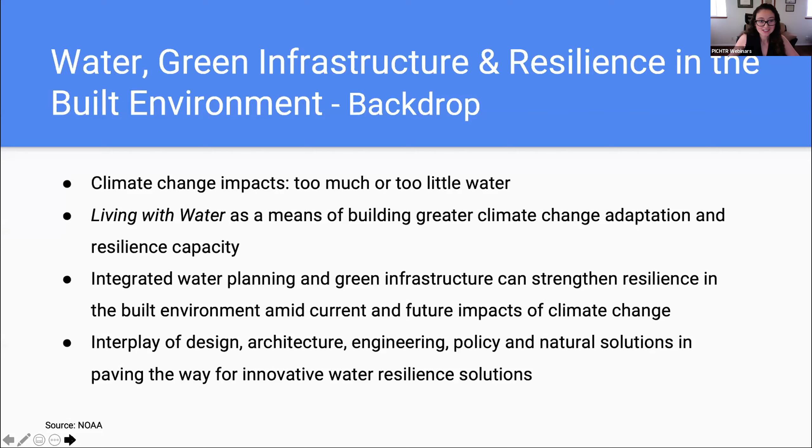As you can see, we have a ton to talk about. So without further delay, I would like to introduce you to our esteemed panelists. First, we have Judith Stilgenbauer. She is a professor of landscape architecture and urban design at the University of Hawaii at Manoa, where she serves as the founding director of the Masters of Landscape Architecture program. Judith's creative work in teaching and applied research focuses on the role of process, performance, and placemaking in ecological urbanism and public open space, that is, design across diverse spatial and temporal scales. Her recent design research has focused on urban and land-water relationships and adaptive coastal resilience design.

We also have Barry Usagawa. He is the program administrator for the Water Resources Division of the Honolulu Board of Water Supply. He administers water systems planning, water conservation, recycled water, long-range planning, hydrology, geology, and project review functions of the department. So certainly he has a huge role to play. Barry is also a member of the Hawaii Community Foundation's Freshwater Council, which developed the state freshwater blueprint for water conservation, reuse, and recharge targets to ensure 100 million gallons a day of resilient water by the year 2030. As you can tell, we have two amazing panelists today.

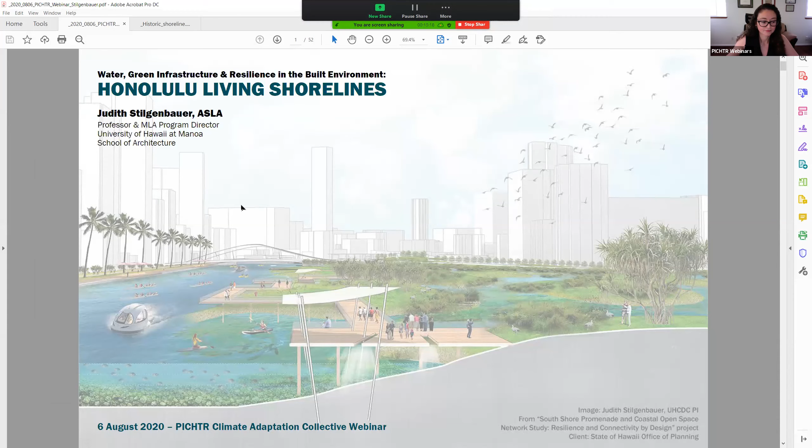So today I want to spend the next 15 minutes highlighting the importance of incorporating nature-based urban design strategies in the long-term planning for resilient waterfronts, in this case applied to Honolulu's primary urban center. Specifically, I'd like to visualize what coastal adaptation strategies, such as living shorelines aimed at decreasing climate-related vulnerabilities, might look like in urban Oahu.

When I give these kinds of presentations, my goal really is to advocate for anticipating climate crisis-related urban challenges, such as multi-hazard flooding and nearshore developments, and visioning potential solutions now, so we can think, plan, and regulate well ahead of time, rather than treating these projects as post-disaster recovery planning.

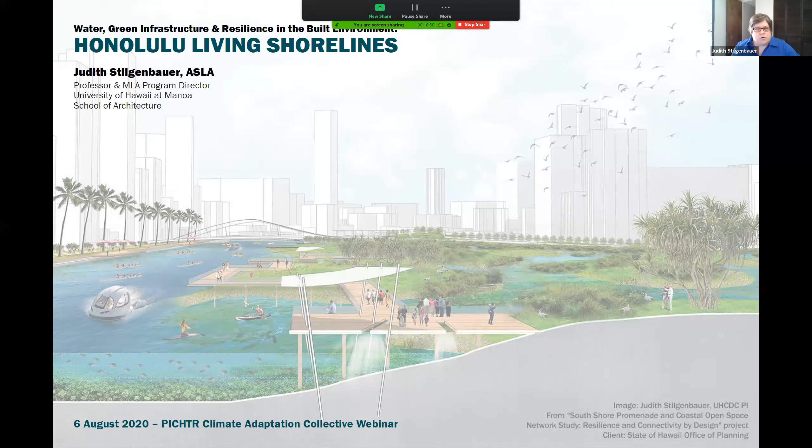So with that, I want to jump into talking a little about green infrastructure. Looking at the attendee list, many of you are familiar with this concept, so I'll keep it brief. At the most basic level, you could think of vegetated elements in the built environment as green infrastructure. These systems harness natural processes by providing ecosystem services for communities and sites—for example, protecting neighborhoods from flooding and managing and filtering stormwater.

It can help us prevent erosion, contribute to combating the urban heat island effect, and through phytoremediation processes has the ability to remove pollutants from soil, water, and air. Green infrastructure also sequesters carbon, and there are many other ecological and social benefits—linking ecosystems, providing habitats, and thus increasing biodiversity and overall resilience.

So as a landscape architect, I like to think that green infrastructure can supplement, or in some cases even replace, outdated, gray, engineered urban infrastructure in smart and also cost-efficient ways.

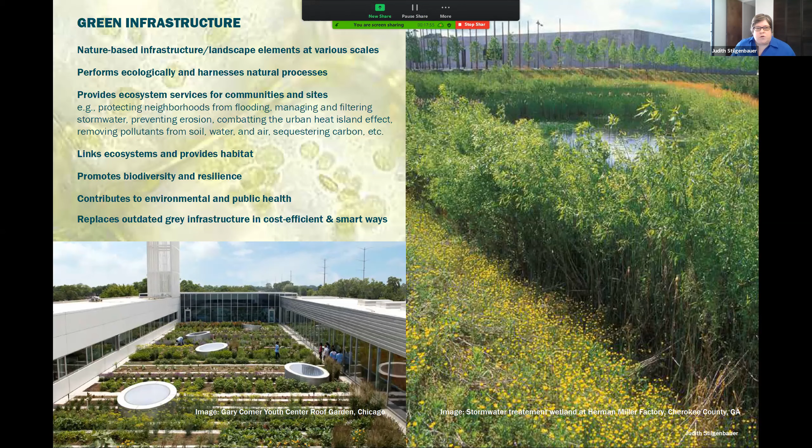So my remaining 12.5 minutes I'll spend illustrating some of these concepts through my team's South Shore Promenade and Coastal Open Space Network project, which we've been working on with the State of Hawaii Office of Planning for two years. I'll use visuals and design drawings from that project to illustrate how large-scale green infrastructure systems can help us address coastal climate-related vulnerabilities.

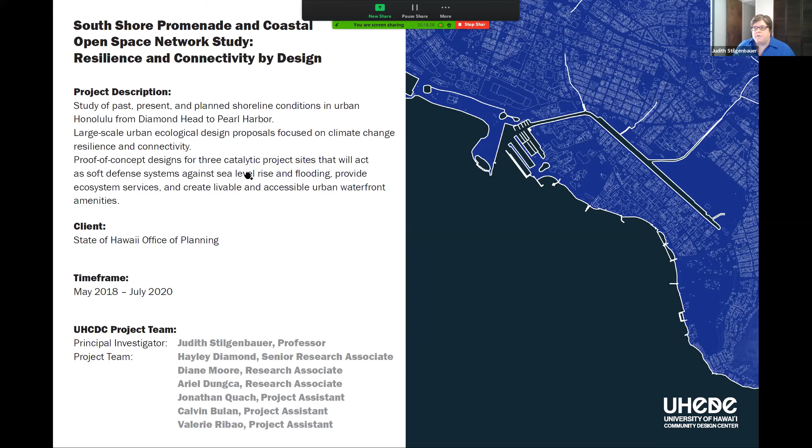What you'll find is that in this type of work, rather than focusing on flood control and sea level rise adaptation alone, we really intend to view urban open space design more comprehensively—balancing aspects of climate resilience, ecological performance, connectivity, and the cultural aspects of placemaking—demonstrating that those goals are in fact perfectly compatible and mutually beneficial in many cases.

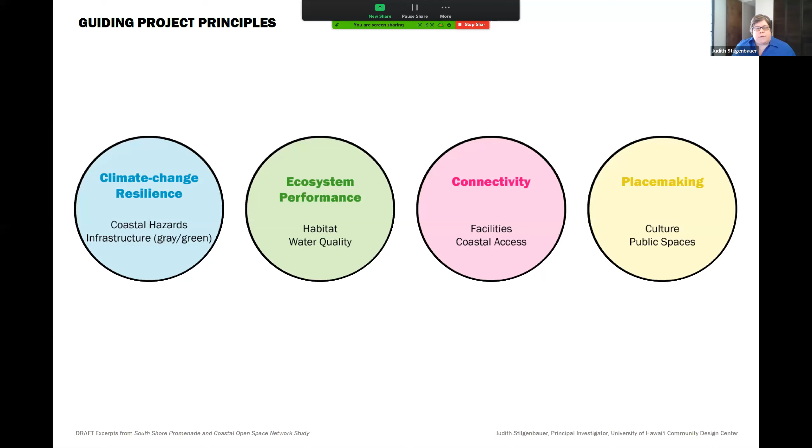So let's dive right in. I don't think I need to explain to this audience the severe impacts we're expecting in the primary urban center of Honolulu over the next 50 to 100 years related to sea level rise and increased coastal flooding. For this project, we did 100 analytical maps that I'm not going to show you today because we only have 10 to 15 minutes.

When we studied these coastal areas, we found that many of the sites—not all of them, of course, but many that are most vulnerable early on—are publicly owned, either by the feds, the state, or the city and county, which, when thinking about implementing early demonstration projects, might help us in this instance.

Now, when we study the outcomes of many related planning and design initiatives across the country, we find several commonly agreed-upon strategies that we apply as planners and designers for dealing with sea level rise and coastal flooding adaptation. I like to use this slide to summarize this—it's of course a lot more complex in reality, but many of us still think hardened, engineered solutions such as seawalls, levees, and so forth are the way to go.

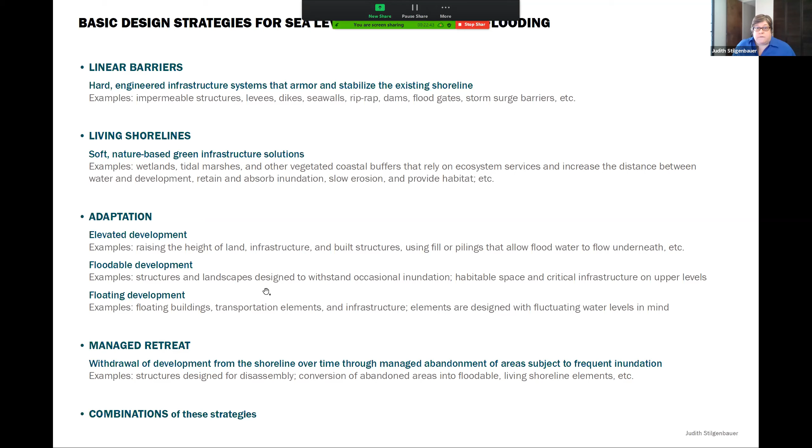And then in the most severe scenarios, I think we also need to acknowledge that there has to be thinking in the long term over retreat from the shoreline, or we have to withdraw in a managed and planned way areas that are subject to very frequent inundation. And that retreat, of course, then would open up opportunities to introduce more living shoreline systems that protect the neighborhoods that lie behind.

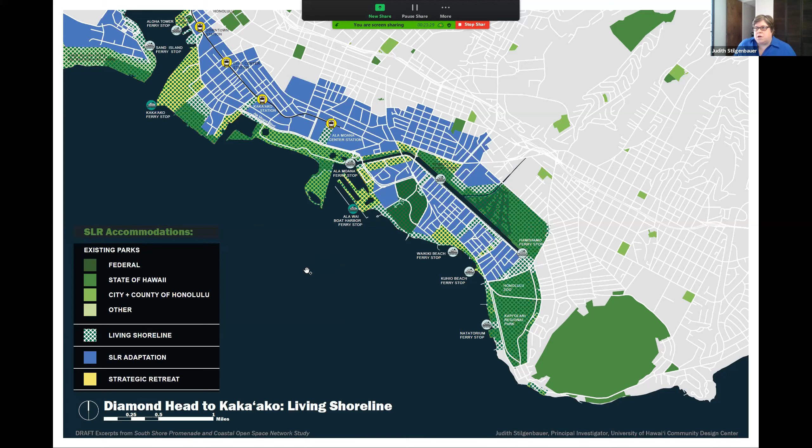So you can see here the project segment from Diamond Head to Kaka'ako, then moving over from Kaka'ako toward the airport, here with Mapunapuna being a major hotspot. And then the airport area is really interesting to my knowledge, and maybe one of the attendees can correct me.

I don't think the Department of Transportation has real plans for how to adapt over time. So that's of course very speculative what you see here, but we like to point out that something has to happen there. And then over from the airport toward Pearl Harbor, the situation looks a little bit better.

So there could be a win-win, where by conceiving some of our shorelines, we also have an opportunity to get rid of automobiles and really provide more connectivity to and along the shore.

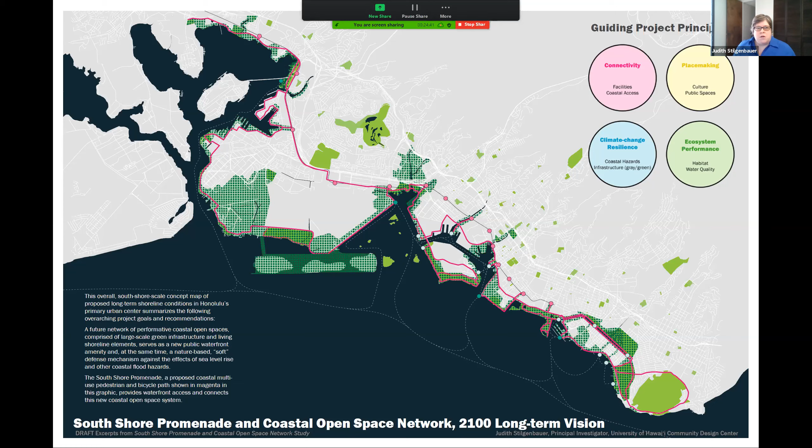Now, another project goal was to really visualize what these green infrastructure interventions might look like if applied to a set of potential demonstration projects. And to do so, my team and I identified three catalytic sites through a process of elimination, where we basically looked at 6-foot sea level rise, the area that's affected.

Then we overlaid large landowners, both public and private, because we argue if there's one large landowner or a few, initial interventions might be easier logistically than if you have 100 private landowners. Then we overlaid that with a 3-foot sea level rise map to identify the zones that will be affected earliest.

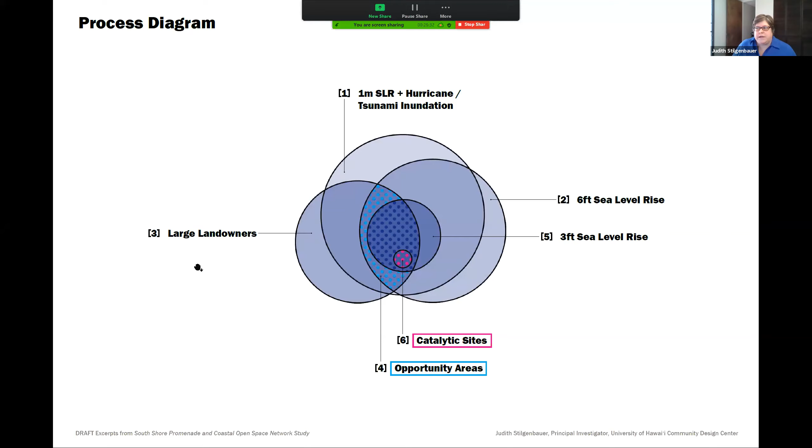And by doing so, we came up with a whole large group of opportunity areas, which we narrowed down to three what we call catalytic sites, where we think of these as projects that if there's political will, some of these thoughts could be tested out in a real world scenario here on Oahu.

And I have 4.5 more minutes left, which I will spend on showing you what that would look like. And I saw one of the first questions in the Q&A asked about the Army Corps project. So of course, parts of the Ala Wai Golf Course and also Waikiki will be affected very early on and are already affected by king tides.

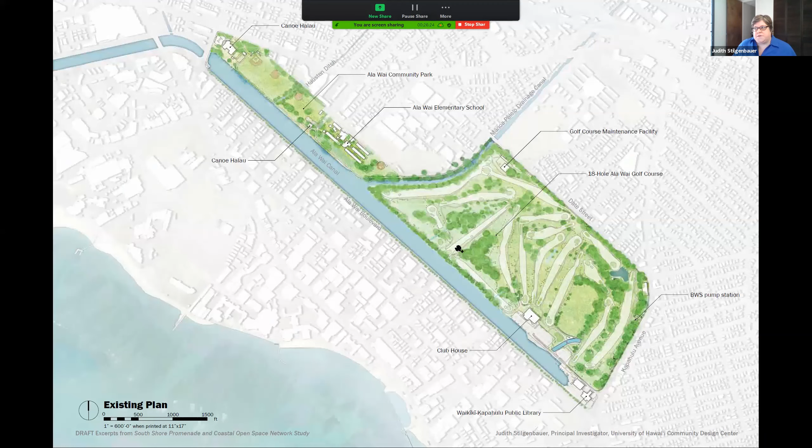And in the next 20 years, we will see increasing instances of flooding. So what we are proposing here in this speculative project is that 9 holes of the existing golf course will be fairly soon converted into a large scale green infrastructure element of wetland.

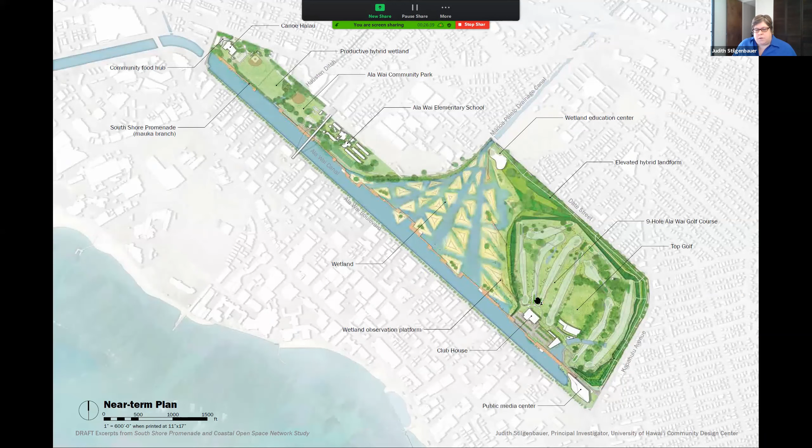There would be a continuous promenade elevated off the ground along the Mauka edge of the Ala Wai. 9 holes and Top Golf could exist for the next 50 years.

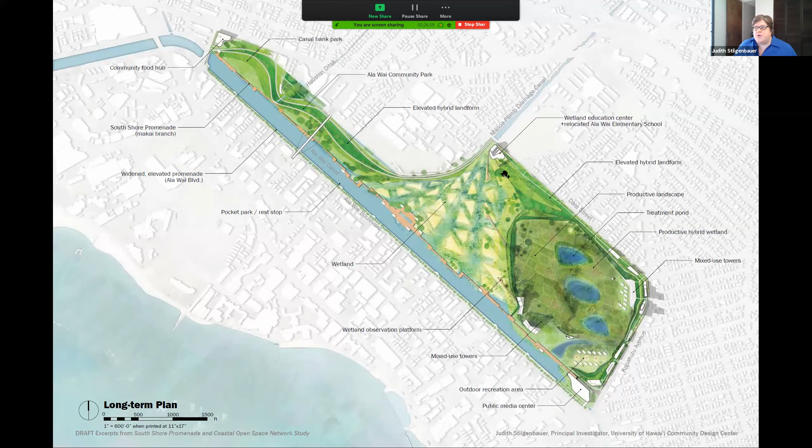And then in the long run, that part could also be replaced by, say, a flood-type urban agriculture system, wetland, such as taro fields, that could support a new, denser, maybe mixed-use development around the edges of the site that will remain dry.

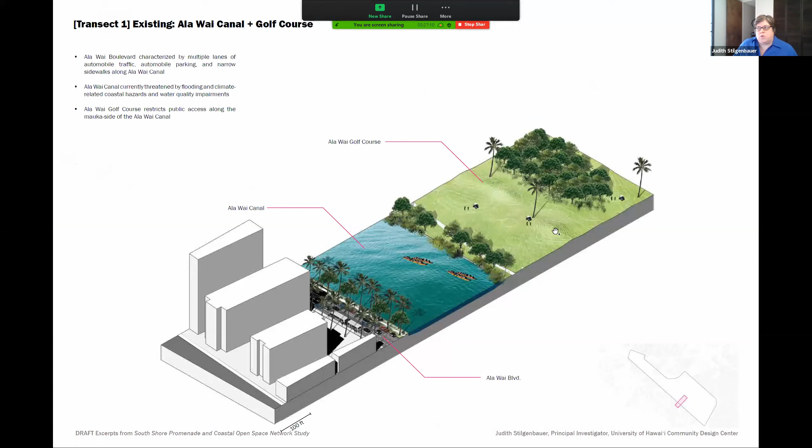To visualize this a bit more, here's a typical cross-section across the Ala Wai, with Ala Wai Boulevard to the south and the golf course to the north, where in the near term, say the next 30 years, the water would be allowed in and part of the golf course converted into a wetland. There's the Mauka arm of the new South Shore Promenade.

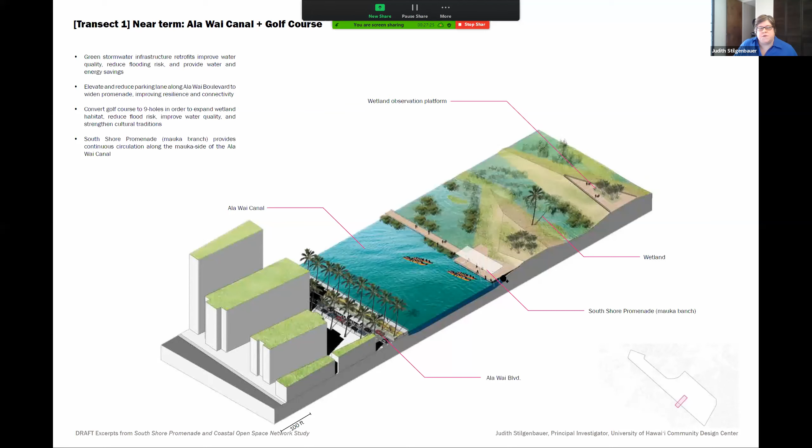Over time, this would develop into a really biodiverse wetland. So in cross-section, the northern edge of the Ala Wai would be softened, water would be allowed in, people could interact with this new park and ecosystem, and in the long term it would become this new floodable, performative, large-scale living shoreline element.

On the south side of the canal, the urban edge of Waikiki, we envision that this purely automobile-centered Ala Wai Boulevard would over time be turned into a kind of super dike—a wide, landscaped promenade with only public transit—that would create a waterfront amenity while also protecting Waikiki from flooding on this side, at least.

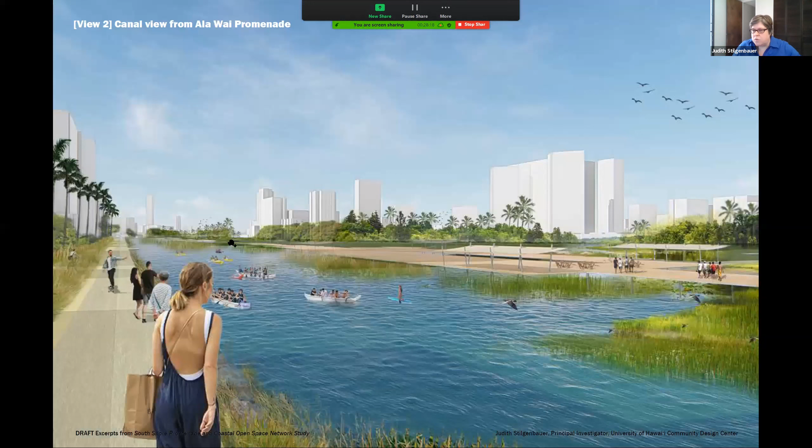Two more minutes. These are some visuals of what those interventions might look like, so the audience can begin to understand how they could interact with these sites and how easy it really would be to do something like this.

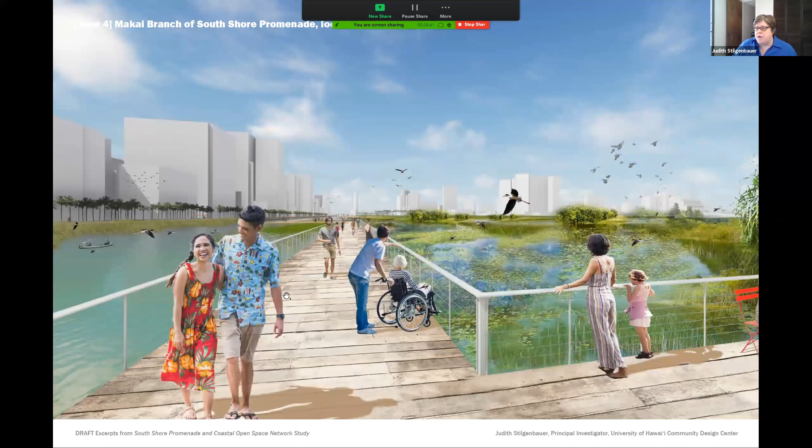This is the newly envisioned Ala Wai Boulevard on the left, promenade on the right, wetland behind it, with people on the promenade. You can see educational opportunities, placemaking opportunities, new shaded gathering spaces prioritized for pedestrians and bikes, and access to the wetland in a safe way that does not disturb the wildlife and habitat functions.

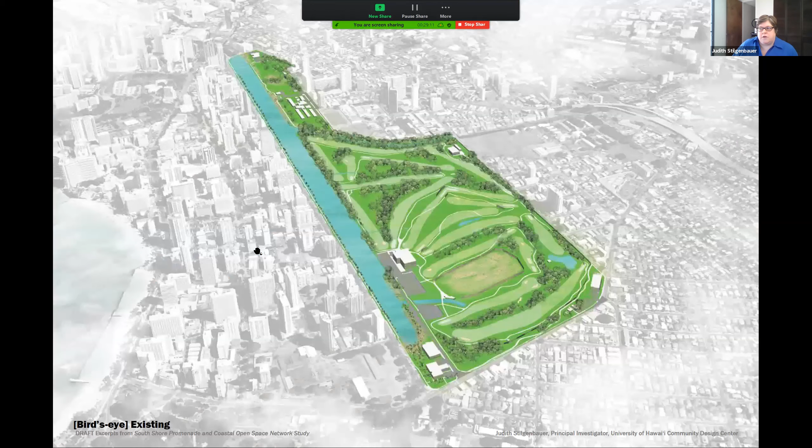A few more views of what these pathways might look like, running on large landscaped berms that help with flood protection, and then a summary of how the golf course over time would be turned into this more performative, large-scale piece of infrastructure.

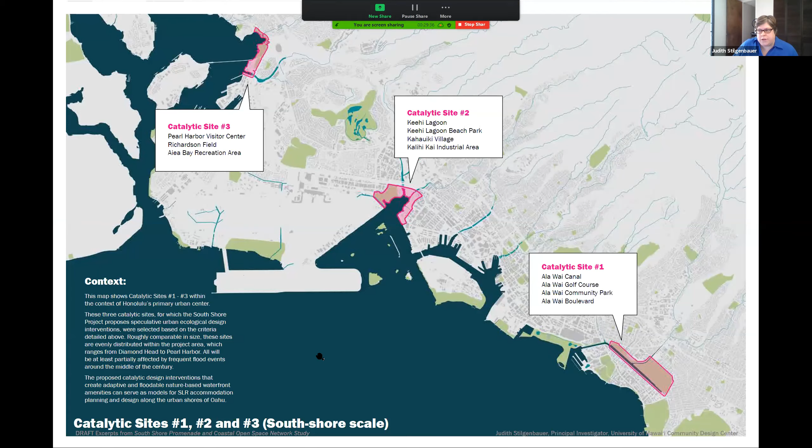Only one minute left, so I won't go into catalytic site 2, but will show a few visuals of catalytic site 3, which extends from the Pearl Harbor Visitor Center to basically the Aiea Bay recreation area. Especially at this location of the current national monument—the most visited site on Oahu—we will see, and already see, flood impacts very early on.

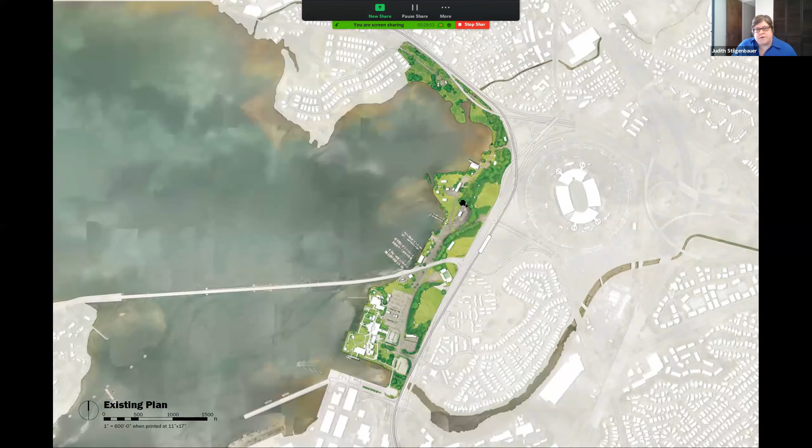Currently this site is heavily dominated by impervious surface parking structures. You can see how in our concept some of this would be converted into wetlands, how new waterfront promenades would hover over the wetlands, and how we're thinking about connecting over to this new denser TOD development and the new Halawa train station.

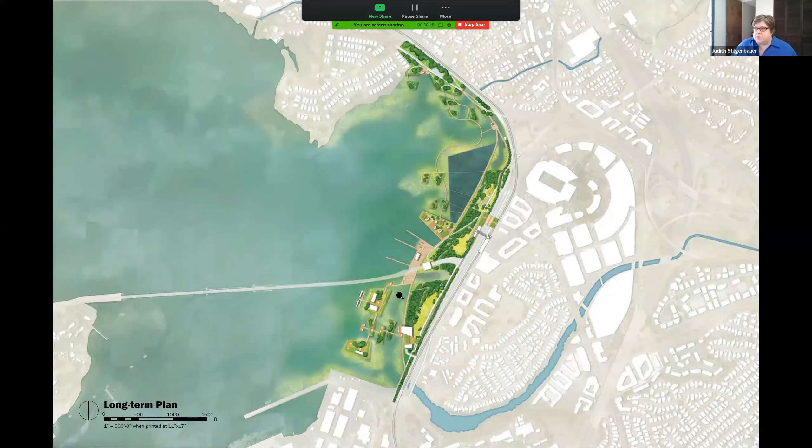Everything that's currently not publicly accessible here would be made publicly accessible, and the visitor center, which is currently very hardened and prone to flooding, would be designed so it can be floodable. We would retreat from the shoreline.

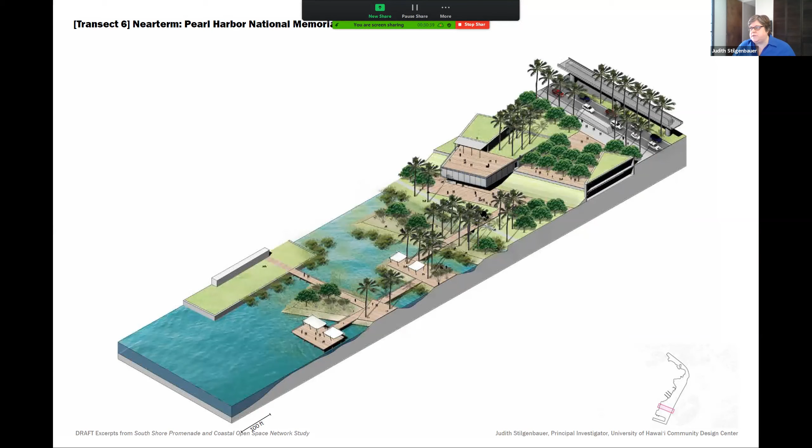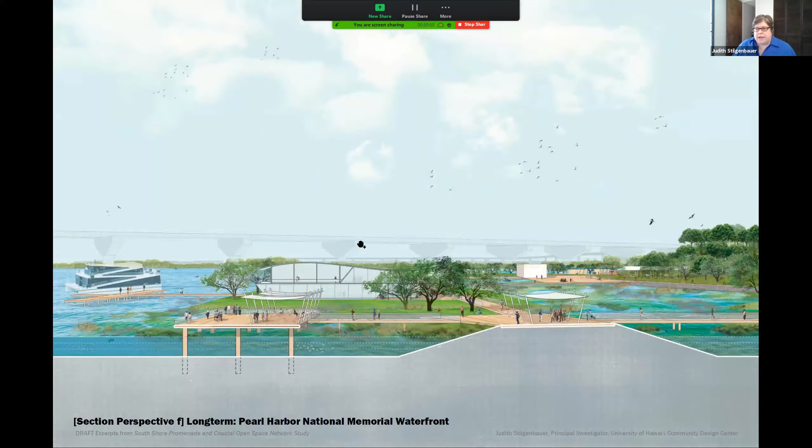Parking would be accommodated in structures, with a little shuttle connecting over to the train station. Over time, it could be an example of what these types of living shorelines and retreat might actually look like.

And these are some of my last visuals, because it's important to us that people can begin to understand what a win-win and improvement these types of projects could really be. Thank you.

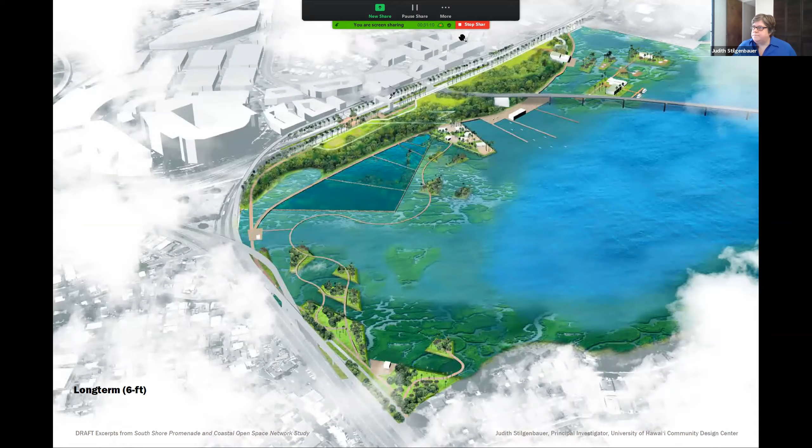Judith, this was excellent. Thank you for helping us reimagine what a more resilient ecosystem would look like when we truly live with water. I love it. Thank you so much.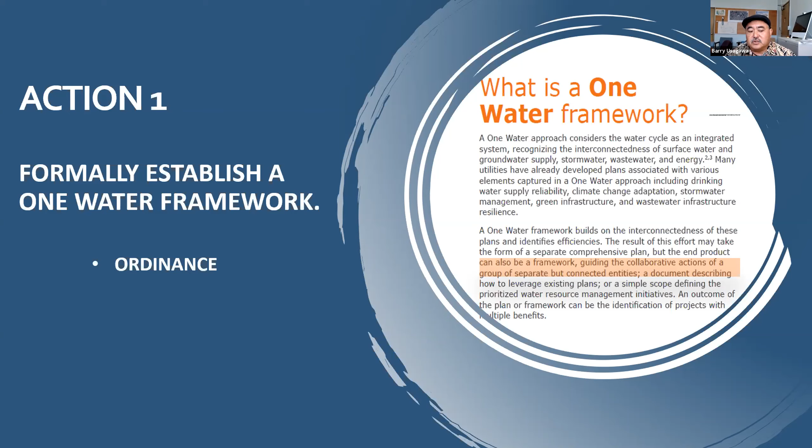The first thing is to establish an ordinance. The reason for an ordinance is to institutionalize the collaboration, because right now it happens on an ad hoc basis, project by project. Having an ordinance enables the action to adapt to climate change, focusing on infrastructure, and we can develop ways to implement the mayor's directive for climate change and sea level rise. There's a draft ordinance we're kicking around right now, and hopefully we can get that submitted to City Council.

Action 2 is developing MOUs. The ordinance is an enabling law, but the MOUs provide the more detailed level standard operating procedures. It's an agreement to work together to advance climate resilience. We identify our common objectives and priorities amongst the various city departments.

So it's not just the storm and wastewater and freshwater guys - it's Department of Design and Construction, Department of Transportation Services, Department of Planning and Permitting, perhaps Department of Parks and Recreation. All of our departments have some play and responsibility towards adapting to climate change. So identifying them, bringing them together, identifying some demonstration projects, and some cooperative funding if funding is available.

Action 3 is to establish a One Water panel. This is to consult on these city projects and programs, to collectively review private development and master plans so that we can put in these resilience features into private development. I think of all the high rises in Kakaako, there's only one that has a large cistern stormwater capture system. We missed a big opportunity there.

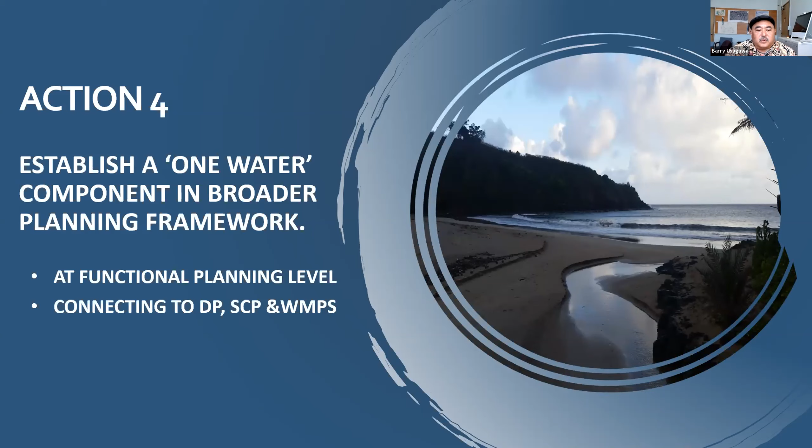Action 4 is establishing a One Water component in the broader planning framework. Already in our development plans and sustainable community plans that you may be familiar with, we are folding in climate change and sea level rise policies that will drive land use actions, and also our watershed management plans, which is the integrated water resource plan for the county.

And those strategies and projects will drive functional planning for infrastructure, for condition assessment, for capacity, and then into the implementing ordinances and regulations, to get things done, so that everyone's kind of rowing in the same direction.

Action 5 is coordinating on a CIP and annual budget for a One Water resilience checklist. As I said before, tying it to budget is important, because every year there should be a question: what's your progress on working on this checklist? This checklist is sort of like a to-do list.

There is a research and monitoring component - Judith already showed the UH and Chip Fletcher's sea level rise modeling, Shellie Habel's modeling. We're working on a groundwater monitoring well network as well. There's policies and regulations, the mayor's directive, but also working on the land use policies now.